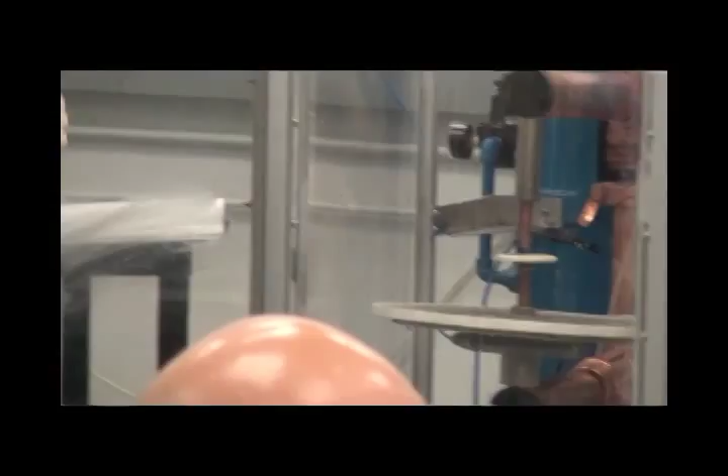So I'll show you, we'll put the current through a wire. There's nothing magical about it. So I have the gold wire loaded on there, and I'm just going to pass the current through it.

Gold was selected because it's very conductive, and that's the standard waveform—it's the output of the spot welder. There's a white trace, which is the current; it can go up to as high as 20,000 amps. Then there's the voltage, which is important—it's extremely low. You can see it peaks out around 8 volts, and there's something called root mean squared, a number that's kind of like the average over a cycle, and it's about 6 volts. So very low voltage.

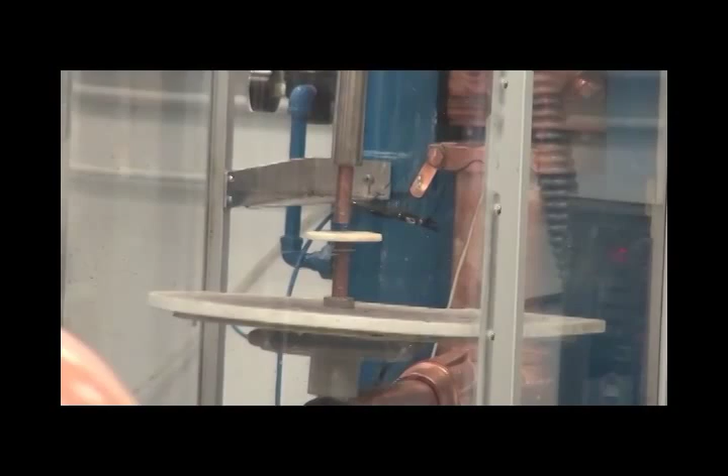We've got this here, let me point this out. There are 2 electrodes here, and then you see those big copper bars—that's the conductor for the electricity. He's going to close that pneumatically, and then those electrode rods will come in contact with the wire, and electricity will flow through it—just your standard kind of spot welding action.

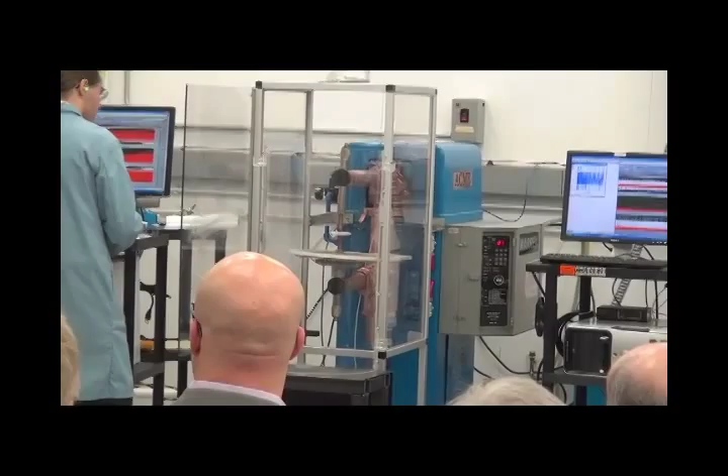So right there is where the focus is. Three, two, one. That's it—so it's just a standard old spot weld, nothing major there. You can see the waveform up there in terms of the voltage and the current and how the thing operates.

So next, Johnny's going to put in one of the solid fuels. This is nothing more than H2O, like this, and copper metal, put into what they call a differential scanning calorimetric pan. We just have a pan to hold it, and that helps with the conductivity, getting the high current through it. Copper is very conductive, so we use a powdered metal, and the water gets displaced and mixed in with the metal, and the metal is going to conduct electricity and allow this new reaction to occur.

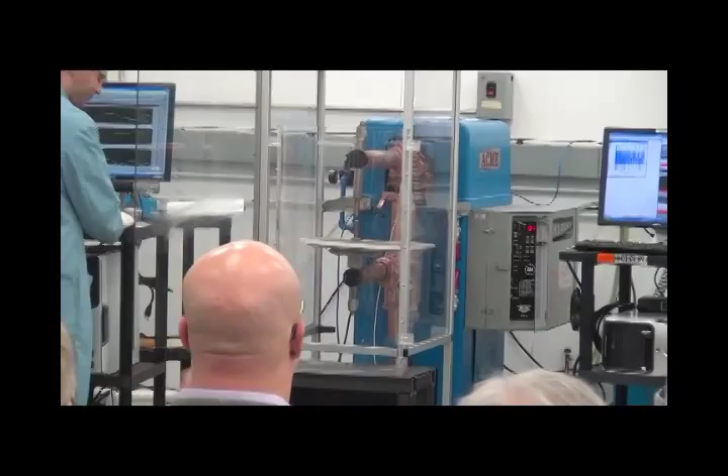So we call this one the Jumpin' Johnny. Three, two, one. All right, let's set off another one. So that was a lot of power.

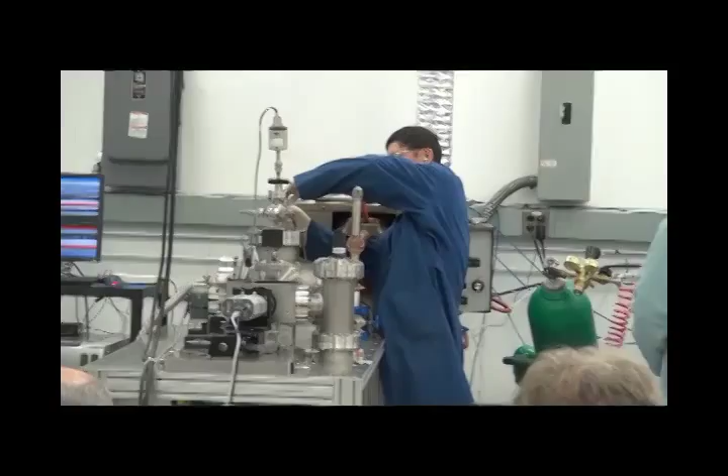Again, it's a standard commercial instrument, all new equipment. So he has another spot welder that will pass current through the rods. You can see there's two connectors, and there's electrodes going into this water bath calorimeter. And in there is one of the copper systems.

It's copper metal, copper oxide to help absorb the water and make it more dispersed, because we lose a lot of current on those smaller diameter rods due to the fact that inside that water chamber, we have submersed a cell that's filled with helium and has the electrodes and contains the sample.

I have to say that the detonations you saw have no theoretical energy possible. What that means is what you observed is not possible by any known conventional reaction. So that energy is being released by something entirely new, and it's entirely dependent on water being present and the high current being passed through it.

Now we're going to measure the thermal energy from one of these fuels. We put it in helium, so it's an inert atmosphere, and the helium helps transfer the heat from the ignited fuel to the water, and helps that coupling progress more favorably. So we get capture of that thermal energy released in the fuel in the water, and we get a very accurate reading.

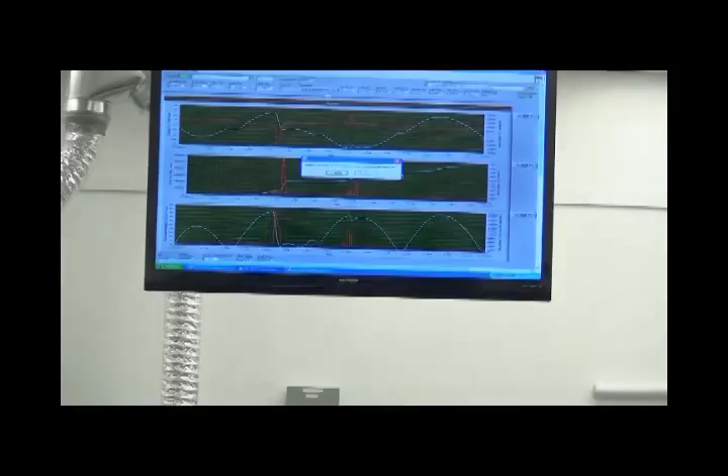Okay, it's detonated. So now his temperature will be rising. I'm going to switch to the screen.

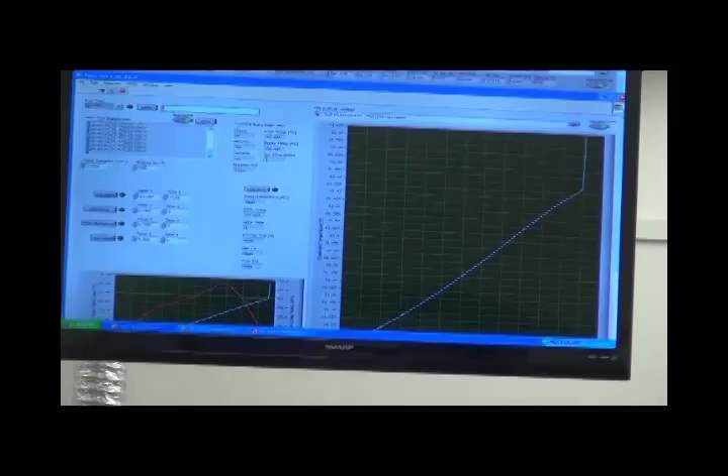He showed you the waveform, so we can integrate the voltage and current, and now you can see the temperature starting to rise in the right-hand corner of the screen. That water is going up in temperature, and then we can measure that temperature rise when all the heat has been transferred to the water, getting an accurate measurement of the heat released in that detonation, done inside a very, very strong cell submersed in that water bath.

It's good and strong because we don't want to destroy our calorimeter, because those are expensive.

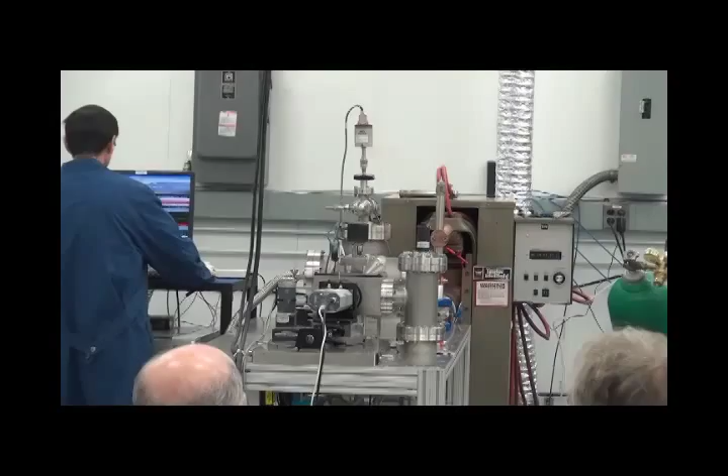What he has is an extreme ultraviolet spectrometer. Go ahead and detonate, and I'll explain why you're doing it. He has another commercial spot welder, with two electrodes going into a solid fuel, in a vacuum chamber.

You don't have to use your earplugs now because that's in a vacuum chamber, and you can't make sound in vacuum. It's in a very solid, thick-walled chamber. That little click was him just exploding inside the chamber. The pressures in these detonations get very, very high—they can get well over 10,000 atmospheres, or 10,000 times the pressure in this room.

But we have a big expansion chamber there. You can see that chamber where that blast expands and allows the light to come out. This is a different kind of light than the light in this room that your eyes are responsive to.

It won't even go through a centimeter of air. It's what they call extreme ultraviolet, or soft X-ray. Now usually you think of high energy light as being very penetrating—well, that's X-rays and nuclear kind of stuff, which is very bad and dangerous. What we're doing is something very, very safe. This light can't even go through air, even a minuscule amount, so we have to have this system under vacuum.

That light then travels to this unit on the end, called a spectrometer. In there is something called a grating, which takes light and breaks it into its characteristic component frequencies. Each frequency corresponds to a wavelength, or if you want to think of it in terms of visible, a color, and an energy. And that light from that instrument will show that this light is much higher energy than any known chemical reaction by about a factor of 100 times.

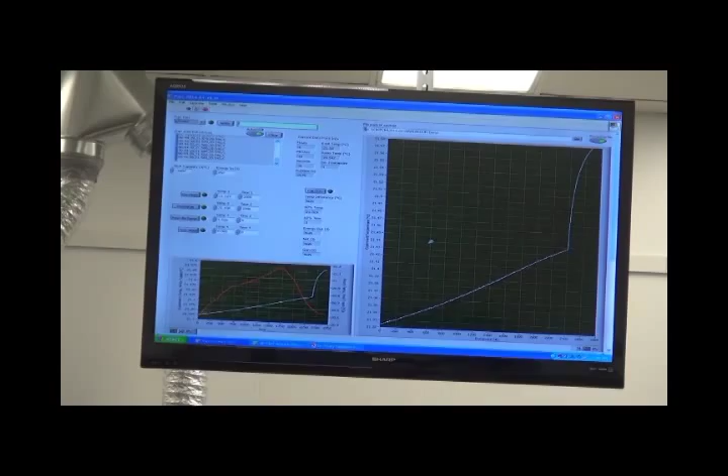Okay, we're just looking and you can see the temperature is rising in that calorimeter. So the thermal energy is being transferred to that water as I'm speaking here, and then we'll come back and get the reading of the energy that was released in that very, very minuscule amount of fuel. I want to talk a little bit about how minuscule that is.

That is a lot of energy for a very, very small volume, because I'll tell you what it translates into. The volume in there is about 1/100,000th of a liter. And you can see from the time scale of the trace we took earlier when we detonated the pellets, the solid fuel materials, that the time scale is about 1/1,000th of a second.

Munitions experts, people who work with explosives, said our time scale is much, much shorter than that, but we're just looking at the mechanical time scale when the system is disrupted by the pressure wave created by that ignition. If you take 1,000 joules of energy released in 1/1,000th of a second, which is extremely conservative—probably it's in the microsecond time scale—you get 1 million watts.

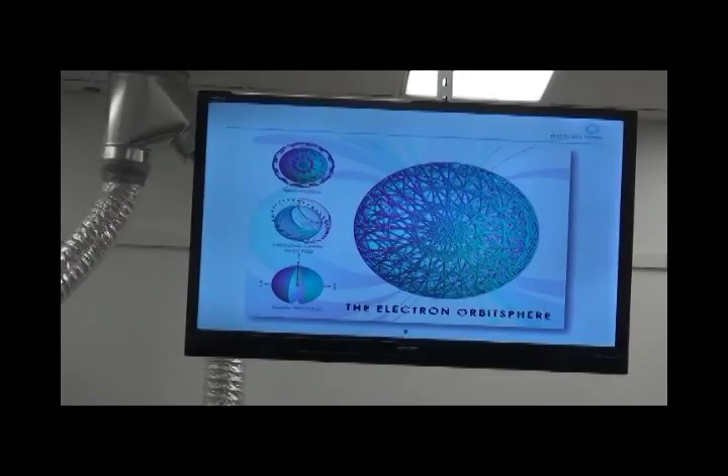So this is a computer-generated model of the electron. You can actually model the current the same way you model the electron, the same way you model current in an antenna or some other physical problem. It's the same types of equations, and it works very elegantly, just as it does on the engineering scale.

And then you can solve things that you couldn't even fathom solving with conventional theory. You can actually solve and then build up molecules on a part-by-part basis. You know how to build a building? You don't say a building's a quantum wave function. You say a building is bricks and steel and parts. You solve the parts, and they go together, and you get something really complicated, but it's made up of little pieces that are much more simple.

So you can solve the individual units that make up molecules. Then you can quickly add those all up and get molecules of boundless complexity and boundless extent by adding those parts together. And guess what? When you add the parts together, the current theory says you can't do that. It works absolutely perfect, again proving that the current theory is not correct.

How do we know that? Well, you can take 415 molecules and add the parts together. Here's the calculated and experimental data, and you can see it's a perfect line to the limit you can measure these experimentally. This is the current theory.

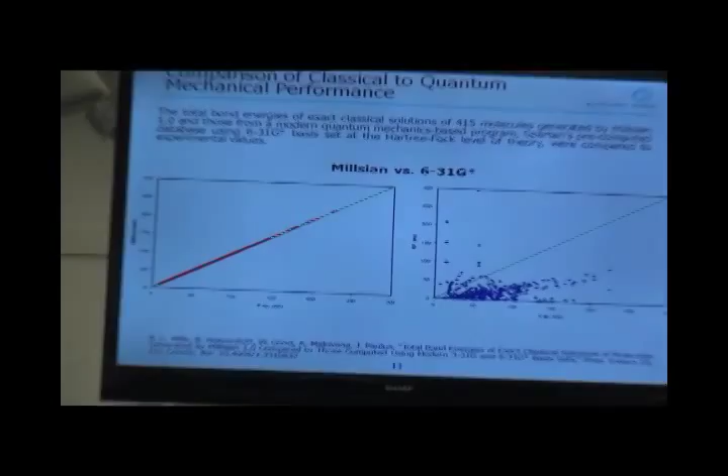It looks like a shotgun blast straight across the screen. You'll see them point to maybe one point and say, oh, the theory works perfectly on that line. But how about all the cases where it doesn't work perfectly? That's what really matters. It's got to work perfectly every time, and where you don't, you don't have the right theory.

So the other thing that condemns the current theory and further disproves it is that you can now actually image what molecules look like. The current theory says you can't show a picture of an electron or a molecule. The electron is everywhere at once simultaneously, has no physical form, and cannot be defined. Well, guess what? You can absolutely image the electrons in molecules now.

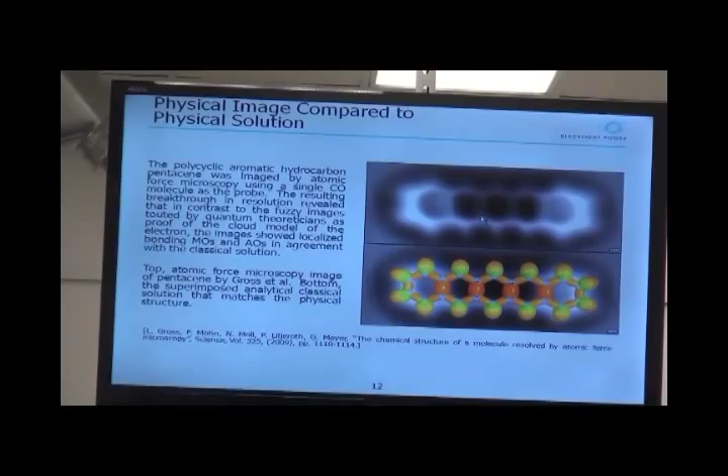This is a molecule called pentacene, and there's a technique called atomic force microscopy that's gotten more and more accurate. This is the solution using physical laws. You can see an atom here, and different bonds here, superimposed very well. All the energies and parameters you can calculate with these physical laws match the limits you can measure. So, like you saw with the experimental evidence from the detonations, seeing is believing. A picture speaks a thousand words. You can actually see molecules, and the solution has to match that picture, and our solutions do.

The quantum theory would say you can't make detonations from water. Water is the most known substance, and there's nothing out there you can possibly fathom that doesn't match our theory, they'd say. Well, guess what? Their theory would say it wouldn't detonate, and you just saw it detonate.

We also have instrumentation on the end that makes it even more compelling. We can take a material, not even a fuel, but water itself, and detonate it initially with a high current to form something called arc plasma. Once that forms, you get extraordinary high current through water itself, and it will make power.

We have that on the end, and then finally on the table at the far end, we have something called a differential scanning calorimeter, where we can pass high currents and power densities typical of what you get in a gas turbine, in the conventional realm. Ours being unconventional, but that's a commercial instrument, and we've shown that to many validators at off-site facilities, and some of those reports are on our webpage. So that commercial instrumentation is on the table there at the end.

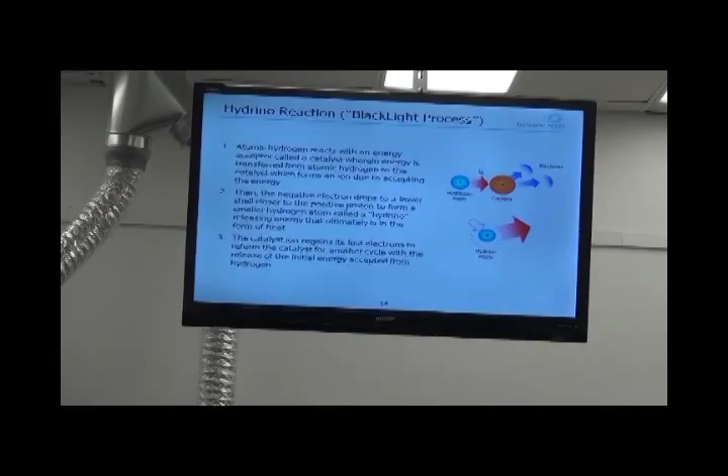So the way the BlackLight process works is you have a hydrogen atom that has a stable state and cannot emit radiation. But if you put that in proximity to something that can accept energy from the hydrogen atom in a discrete amount, that energy will flow to that acceptor, and the electrons will have to be ionized as a consequence of accepting that energy.

In our case, what I was saying before, these particular electrons, or this step of the reaction, are limiting. So the reaction will propagate until that charge builds up. It does not take much charge to build up until the reaction becomes limiting. So we run a very high current through it, and that allows that reaction to propagate at very high kinetics.

We then form an intermediate, which you can see as the dotted dashed line. The hydrogen atom has its initial radius, but once it's transferred energy, that's changed it to a different state, a different electronic state. It can't stay stable in that state, so the electron drops down to a closer orbit around the proton, the positive binding center, and releases light in terms of strong, very high energy light in the extreme ultraviolet that Dr. Ying is going to show you.

So you might say, well, what is the acceptor? What's that? Do you want to fire? Oh, okay. So Dr. Ying has the spectrum. Okay, that sounds good. So Dr. Ying has the spectrum already. Looks like he's got a really nice spectrum there.

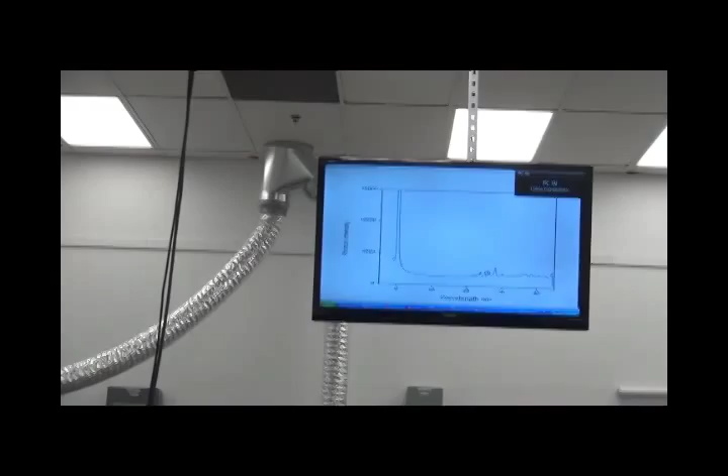Johnny's going to put that up there and run another one with this filter that blocks that high energy light. What you can see is, on the end here, there's a very, very high peak. That integrates all this high energy light over all frequencies and shows it in one peak.

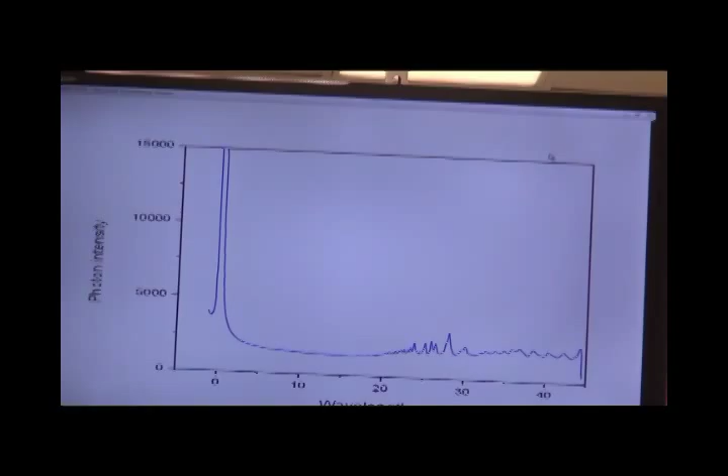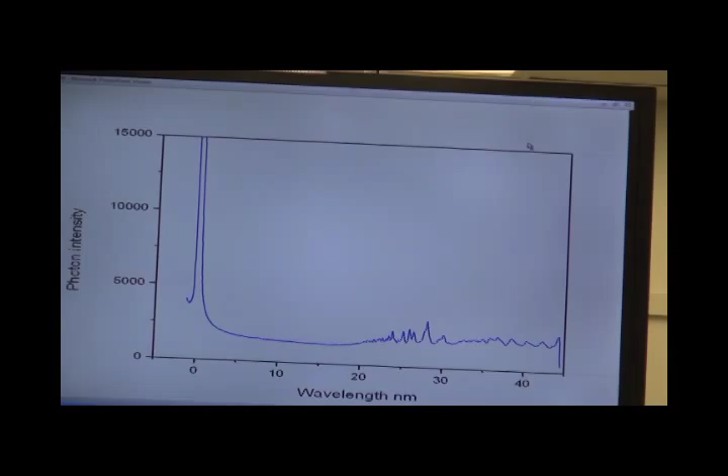In addition, you can see starting around 17 nanometers on this scale, that is very high energy. When you ionize hydrogen, the energy or wavelength released from that is much, much weaker. That shows up at 91.2. That's the energy just to tear the electron away from an ordinary hydrogen atom. So this is extremely, extremely high energy, even compared to that.

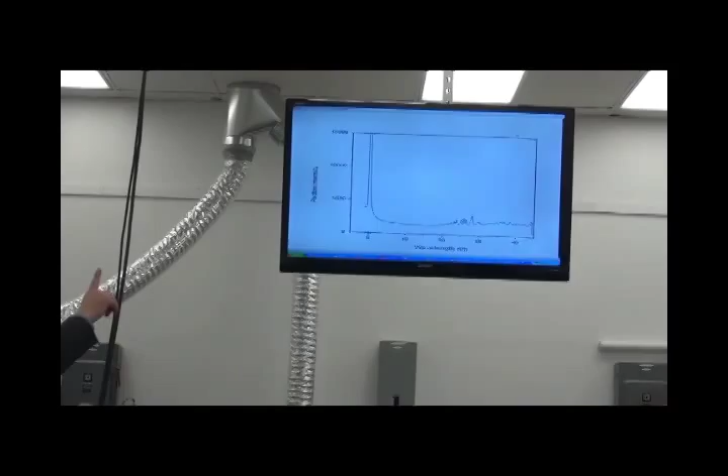Typical chemical reactions are a very, very small fraction of the energy it takes to tear the electron completely away from the atom. You can see there are peaks starting around 17, and then a really big peak at what they call the zero order, which integrates all this high energy light. He's going to come back and show you with another experiment that blocks that high energy light and proves it is this very, very high energy light that is the nature of the emission.

So then you might want to ask, what exactly are the kinds of acceptors that make this reaction work?

Well, again, there's a remarkable thing about water. The solution to water in terms of this classical theory is that you can have water accept energy in an exact packet of 3 times 27.2 electron volts. That number is a very special number - it's the energy the electron has relative to the proton in the uncatalyzed hydrogen state. If you take a negative electron and positive proton, the energy between those two is 27.2.

If you have something that accepts an integer amount of that energy, it can cause the hydrogen atom to go down to the lower state. Water has an increment of 3 times that packet of energy.

Not water like this - this is water that's hydrogen bonded. That means all the water molecules are interacting. Otherwise it'd be a pure gaseous state. Even in a gaseous state like steam, water has molecules that are bound together.

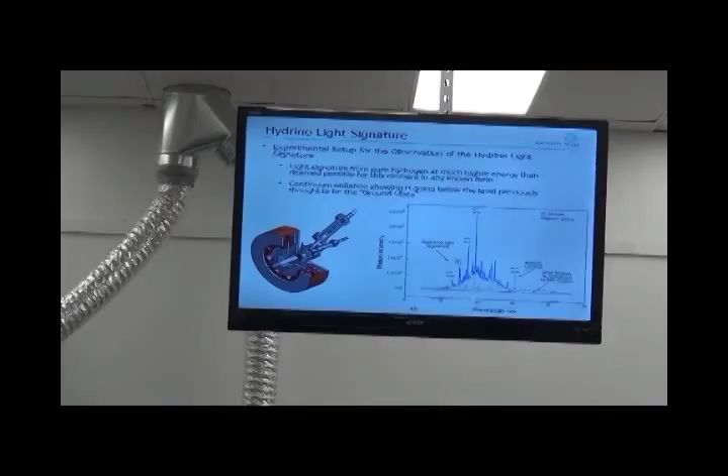This is a spectrum we've gotten before, published in European Physical Journal D. The editors wrote a note about how major this was. Then we got criticized that it could be due to some high fields. This is a discharge triggered by an electron beam. It's high voltage. We did a lot of tests to show it couldn't be due to the high field, but our critics wouldn't accept that.

So now we have something that has no high field at all, and this absolutely proves our point that the radiation is coming from forming this new state of hydrogen. It's a very, very important development. So we show the energy, power, and the detonation, and we also show the characteristic signature of this new form of hydrogen that has no alternative explanation as the source of that energy.

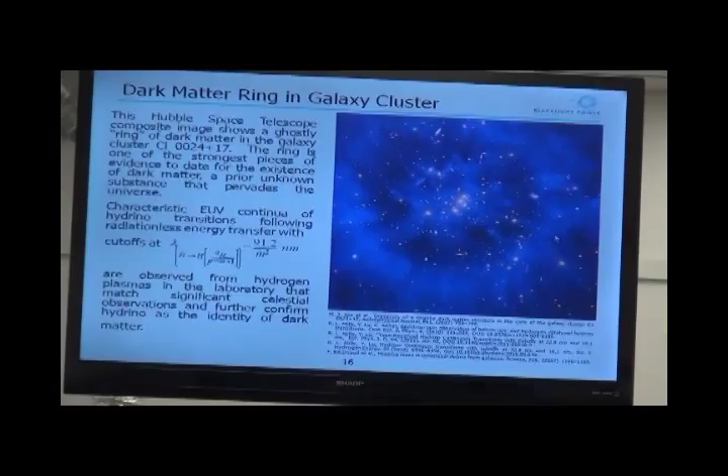How do you know that there's matter there? Because you can see galaxies like these that are comprised of hydrogen. In fact, everything you can see is hydrogen for the most part, but here it's not really emitting relative to this background. These galaxies have a very unusual structure, and the reason is that they're being gravitationally lensed from some other region in the universe. You can tell that by changing the angle of the telescope.

So this is absolutely seeing is believing, like we're showing visually that you can detonate water. This is showing visually what dark matter looks like. It's a real thing, not something people thought about in theoretical terms. It's actually a physical phenomenon that you can observe, that there's mass that has gravity, but you can't see it visually.

The reason is, once you form this new state of hydrogen, it cannot absorb or emit light. It's a different kind of reaction. Remember, we have a catalyst that accepts the energy, and then the electron drops to this lower state and releases continuum radiation. So it's different than the typical mechanism by which electrons absorb in ordinary materials.

So this hydrino is unique in that characteristic, that it's dark. But we can see it by other analytical techniques. We can show that it rotates, vibrates, has an NMR, and other characteristics. We have a number of analytical techniques that will show this new form of hydrogen. This is just a listing of those - common spectroscopic techniques used on other ordinary compositions of matter. There are specific energies or frequencies that absolutely are characteristic of and identify this new form of matter.

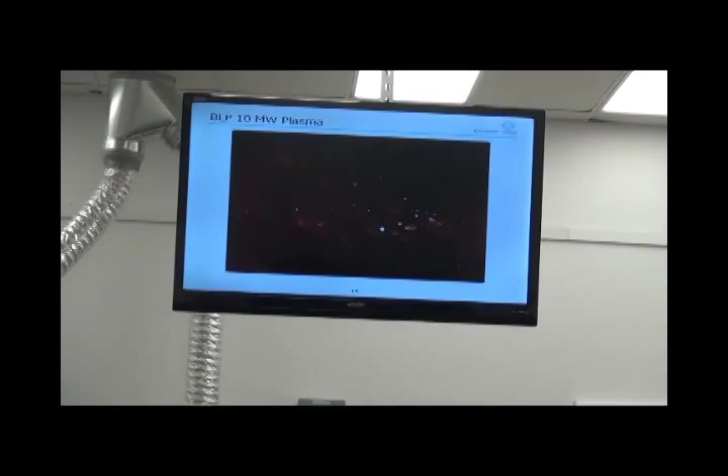I'm going to show you what the plasma looks like when filmed at 6,500 frames per second - this is a camera they use to film explosives - so the time scale is much, much shorter than your eye can appreciate. What this shows is that the solid fuel is becoming completely vaporized and completely ionized, expanding at supersonic velocities, meaning it's going faster than the speed of sound.

That extraordinary high kinetic energy and highly ionized state is a flow of current, and that flow of current can go into a direct plasma-to-electric converter. There are two common types of plasma-to-electric converters: one is called magnetohydrodynamic, and another called plasmadynamic, which we actually invented here at Blacklight. The magnetohydrodynamic relies on separation of charges in a magnetic field, captured in two electrodes. The plasmadynamic is a similar type of process. I'll come back and show more details of the magnetohydrodynamic.

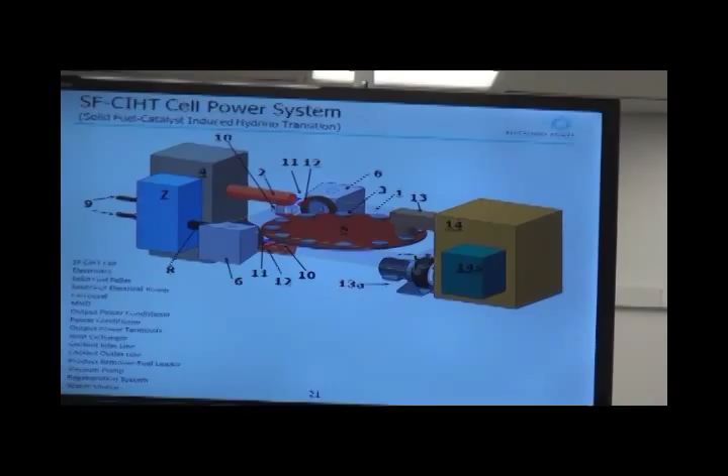To make that ignited fuel into a continuous process, we have to feed the pellets mechanically in almost a continuous stream. In other words, you have so much energy, and energy times frequency gives you power. So if you took one of these pellets and put it in once a second, you would have 10 kilowatts. If you put it in at a frequency of 1,000 hertz, that comes out to be 10 megawatts for the amount of fuel we're proposing to load. I'll give you the dimensions of the fuel and the characteristics of the machine we intend to build to deliver 10 megawatts of electricity.

This is a mechanical carousel that would robotically load fuel pellets. This is not our ideal design - it's just conceptual, to give you the idea that you would add fuel in increments, and if you add that increment fast enough, eventually it would appear continuous. Like movies - once you go beyond 33 frames per second, your eye sees it as continuous motion, even though the film is discrete individual frames. Same principle applies like an engine: if you hear it firing very slowly, versus at very high RPMs, it almost sounds continuous.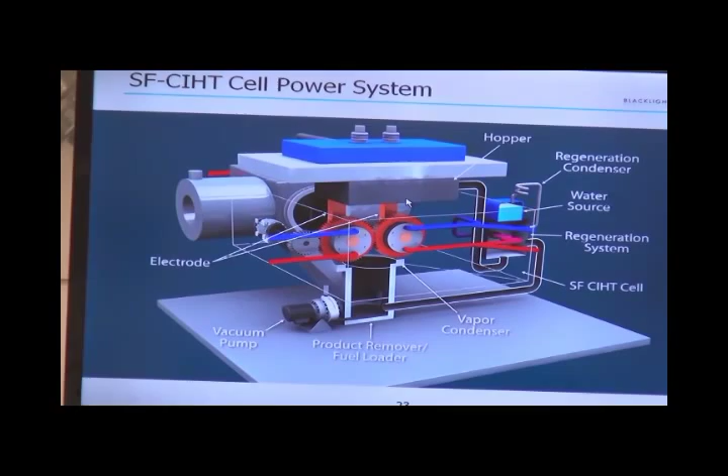So, this is our basic system. It's 9 inches by 9 inches by 9 inches. It'd be a 10 million watt electric generator. It has different parts. These are all off-the-shelf technology that can be integrated as parts into this generator. No new technology.

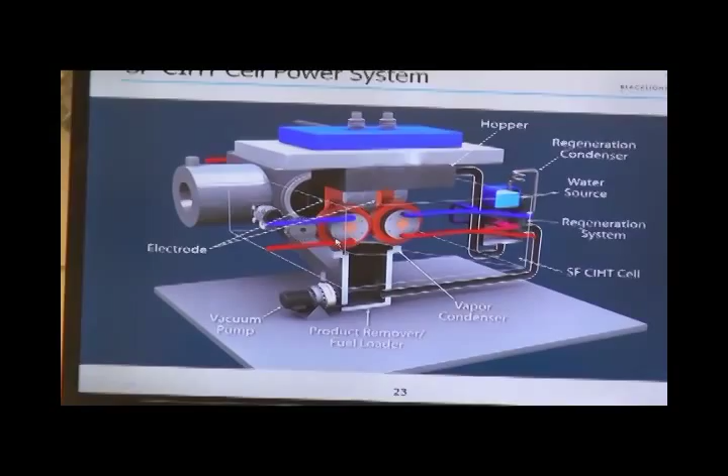So it has a container that holds the fuel. As you see here, the electrodes, it has electrodes, and then they have on it a stationary hub. They heat sink these gears. These gears are driven by a drive gear and a drive gear motor.

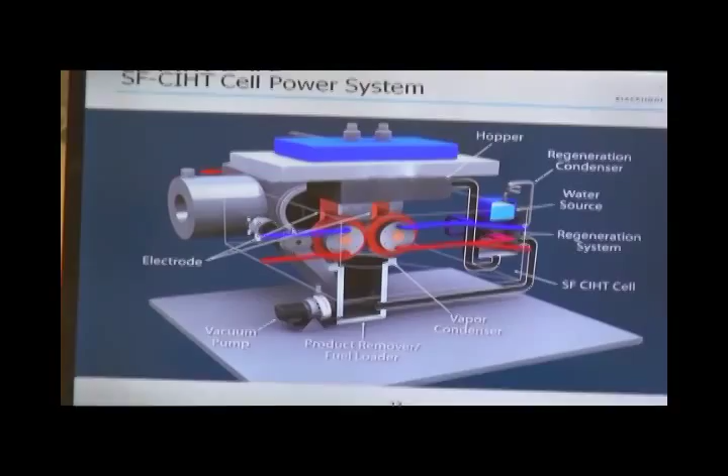So how big would the gear tube have to be, and how many teeth, and how fast to make 10 million watts? Turns out to be at a 62 gear, going at 1,000 RPMs, and the depth of the fuel was 2 millimeters, and the base was 4, and the gear was half an inch, about a centimeter wide. That would give you 10 million watts.

So it's not very much. To give you an idea, 1,000 RPMs is really trivial. The Formula One racers are limited at 18,000 RPMs for a 4-stroke engine, which is very, very complicated with valves, camshaft, crankshaft, 4-stroke, 4 different parts of the cycle. They're running at 18,000 RPMs. We're talking 1,000 RPMs just for turning gears. It's really, really mechanically trivial.

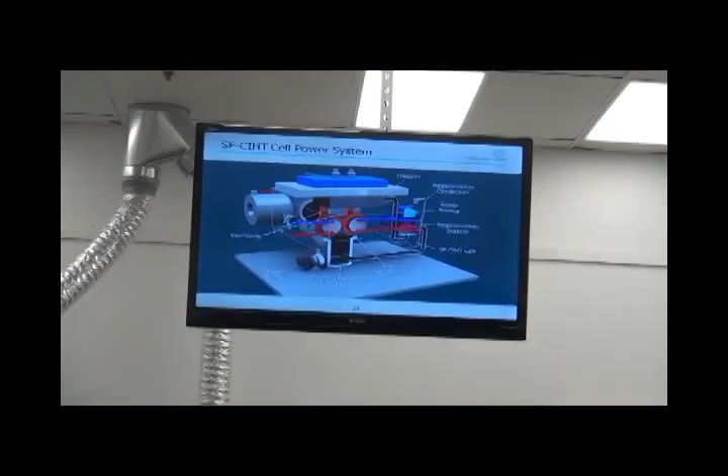So then we have a chute in the back here to collect the fuel. After the fuel fires, the plasma flows into this magnetohydrodynamic converter, which I'll explain. And then that fuel flows back to chute. It's recollected, goes back into a circulating system like an auger, like they have in the pharmaceutical industry.

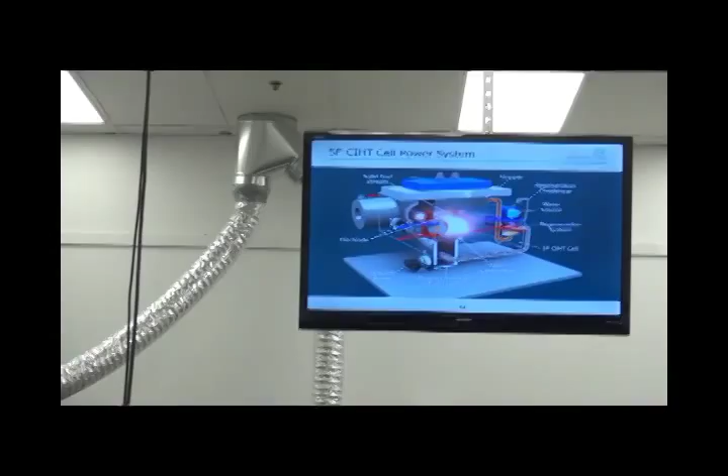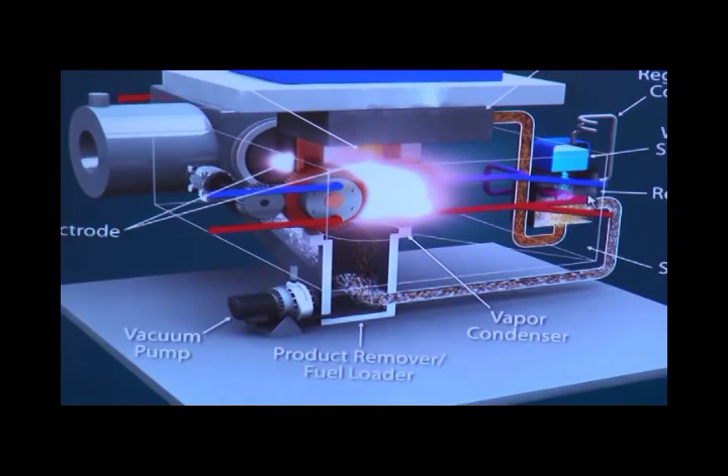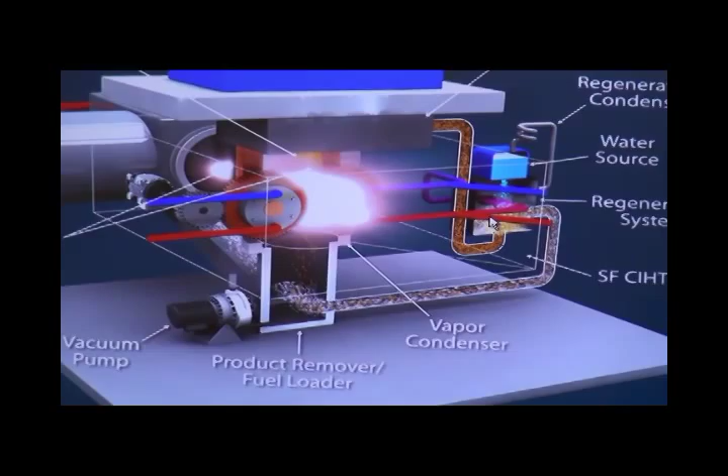Goes into another reservoir. You can see there's steam in here. Steam is formed by water falling on a hot heat exchanger. The heat is coming from this heat sunk here, and it's being returned by this cold coolant line. So the water forms steam, the fired fuel comes in, gets rehydrated, and then goes back into the fuel reservoir, and then gravity feeds into the gears again. It's very, very simple.

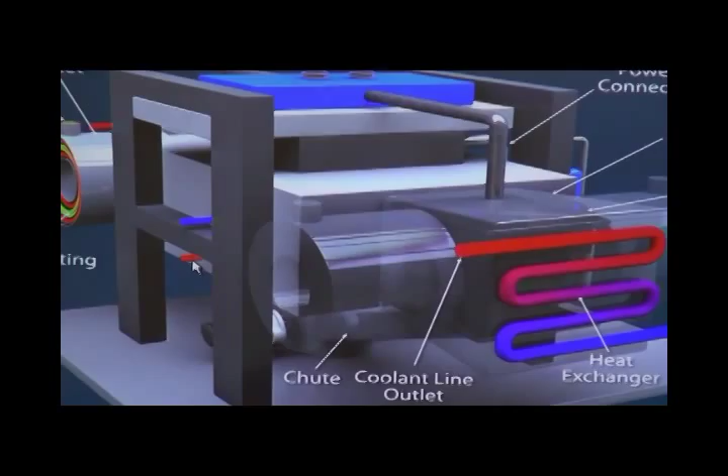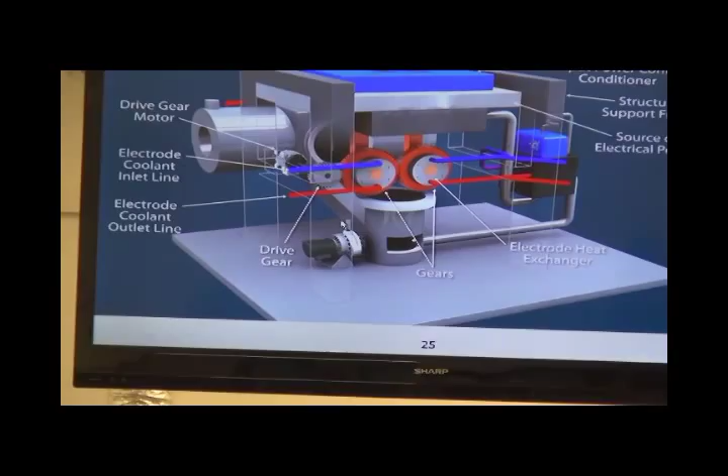These are magnets. I'll talk about the magnetohydrodynamic system in a second. There's a vacuum pump that pumps down this vacuum chamber. You can see the outline here in white of the vacuum chambers. It's all sealed up, runs under a vacuum.

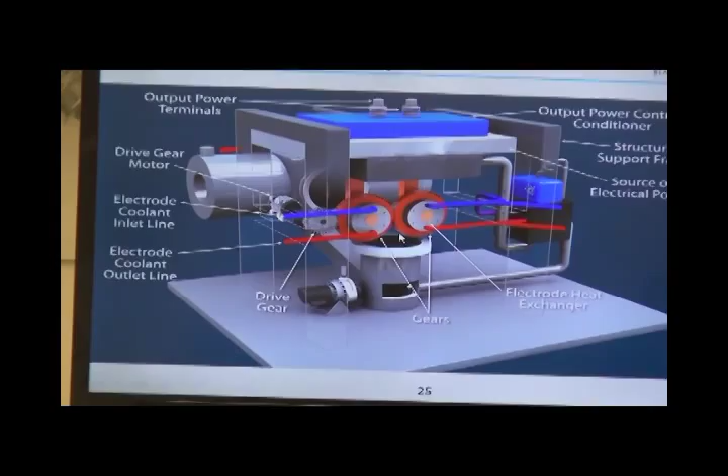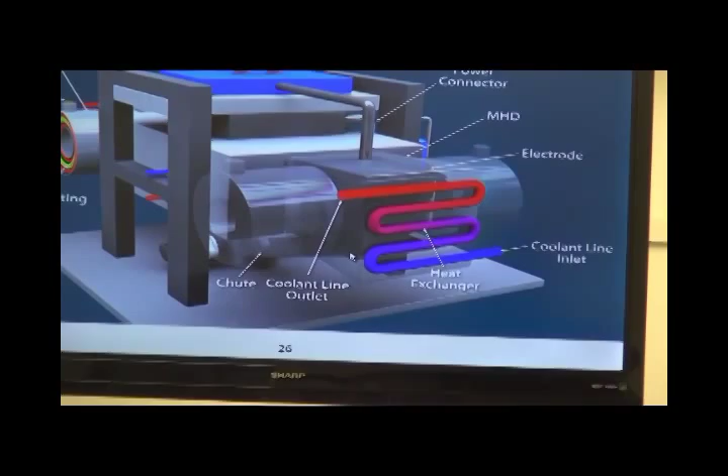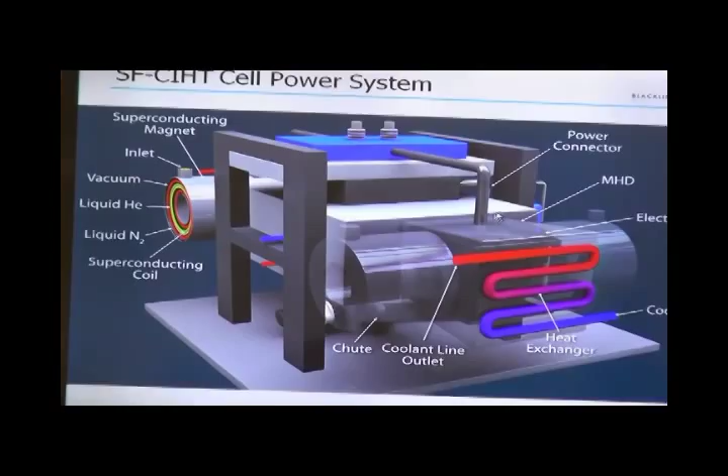These are magnets for the magnetohydrodynamic converter. This top plate, and then there's a symmetrical bottom plate on the bottom. That is the electrodes that collect the current from the magnetohydrodynamic converter. We would use superconducting magnets. This is a power conditioner. This is a source of electricity for the electrodes. This is a power connector from the electrodes of magnetohydrodynamic back to the power conditioner. Magnetohydrodynamic puts out DC electricity. High current DC electricity. That's what we use on detonation or ignition of these pellets.

High current DC. So a portion of the electrical output could run the system. So it can be completely autonomous of the grid and also autonomous of fuels infrastructure. And as I show, it can be used for every conceivable application within the size range that you can make these units.

Randy, a quick question. How would you start that unit off-site? What kind of a battery starter? Big DC. Or super capacitor. And then power conditioner would have that as part of the system.

So, Sam brought up a point. This power supply is nothing more than capacitors. Basically like a can of soda. They weigh about the same. And you can store a lot of charge in it, and then it can act as a battery for very, very fast delivery of power, a very, very high current. So that's what we would use. Something that's very, very cheap.

So I'll explain the MHD here in a second, but basically the cost per unit would be these magnets. These superconducting magnets, even if you want something, they're very, very small. The whole volume here, again, is 9 by 9 by 9 inches. Even if you want some crazy number, like $10,000 a magnet, you got 40,000. You got a couple $1,000 in terms of sheet metal to make the vessel, to make the MHD plasma expansion chamber. You got a couple $10 in electrodes.

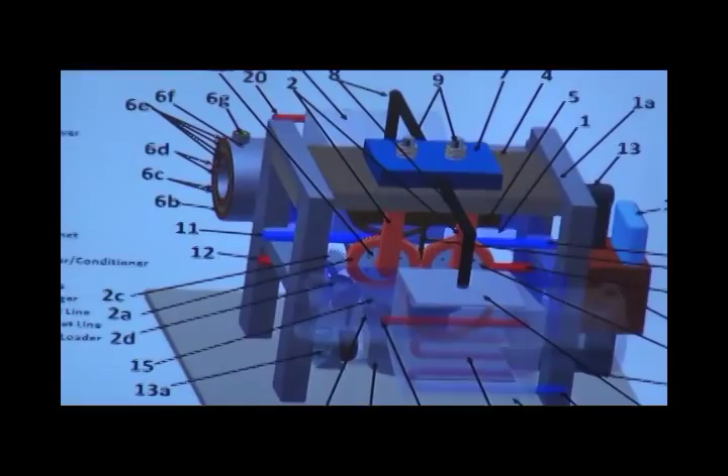This is on our web page, we have the PowerPoint with these slides and the different parts. We're looking for companies to partner with Blacklight—we're already talking to a number of them now. We want to partner to make parts: they can make the electrodes, the gears, the magnets, the power controller, or they can source electricity for the electrodes, etc.

So we will work with different companies and assemble those components to make our generators. Our business model is to license original equipment manufacturers to make the units for Blacklight, and Blacklight would lease them to power users under power purchase agreements.

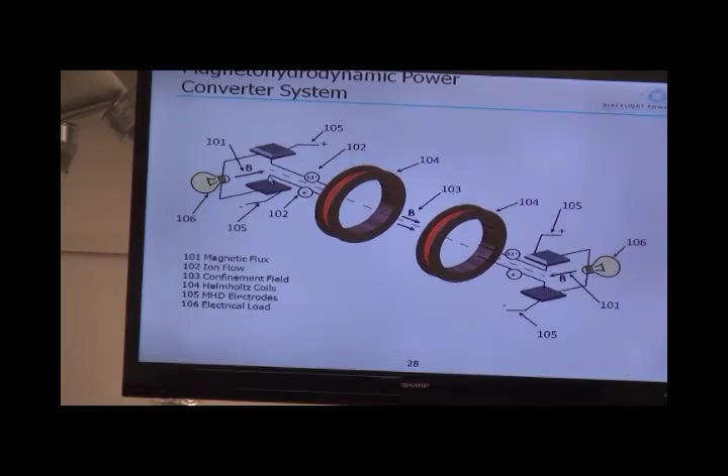So the way Magnetohydrodynamics works is very simple. You have an expanding plasma, which you saw in that video. This coil is a magnetic field that guides the plasma so it goes axially. It goes into a cross magnetic field so the plasma goes along its axis, and the positive ions are bent up and negative ions or electrons are bent down because of the force of a cross velocity in a magnetic field—this is the Lorentz force.

So you have a cross field with a flow of charged particles. It's deflected in a mutually perpendicular direction to both of those. So it goes to the top or bottom electrode depending on the charge. That gives you a voltage, then you can pull power directly off that core.

So what a magnetohydrodynamic converter is, is a motionless generator. It's like a generator in a conventional power plant, but it has no moving parts. The current, or the part that substitutes for the moving part, is the flow of plasma. In a conventional generator, you have to mechanically spin a wire; in this, the plasma is flowing—that's the conductor, like a wire, moving in that magnetic field and producing the electricity.

So this is really cheap. The power in the plasma is very high, so you can make this very compact and very efficient—again, very low cost on a per watt basis. This one is an old one that's been around for a long time. Yes, I'm going to show that. Magnetohydrodynamics is a known technology for many decades.

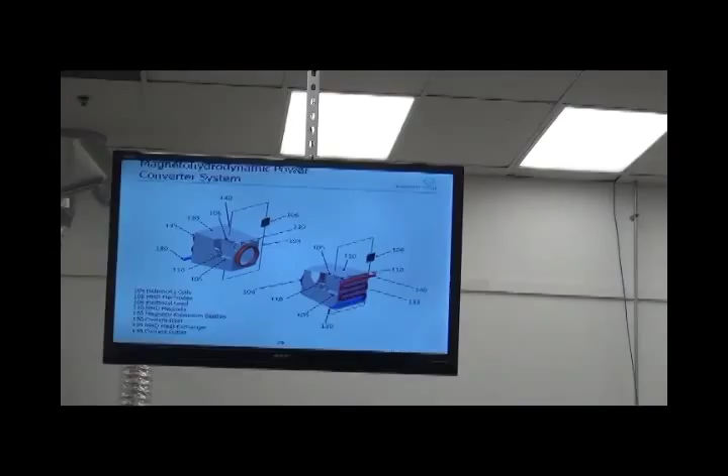Just go to a volume-filled schematic of that. It's showing, here you can see the placement of the magnets transverse to the plasma flow, and then transverse to both—you have the electrodes.

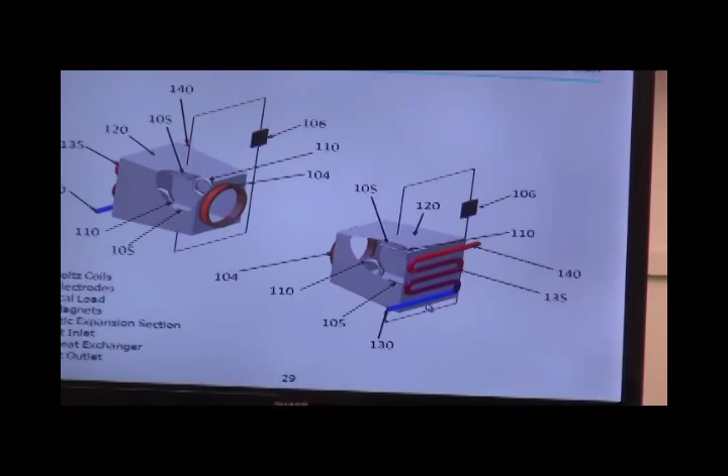You also have a heat exchanger on the back that holds this device, because you're going to have some heat produced—we have heat transfer experts working on that. One advantage is we have very concentrated thermal energy, which makes it much more convenient to remove.

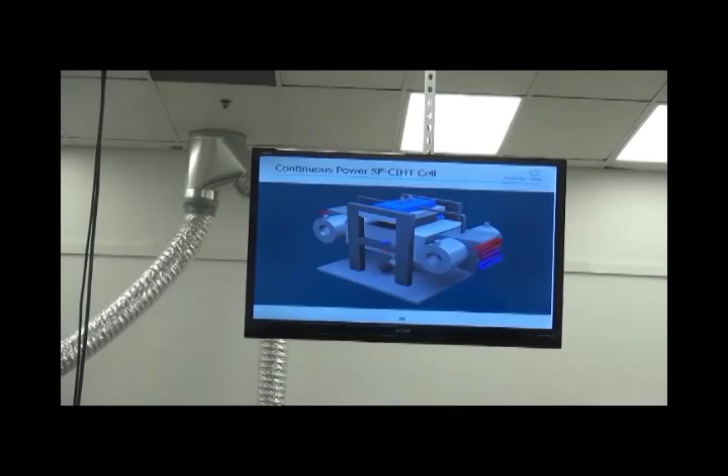So this is just an animation that goes through the workings of this schematic design of our engineered system, and shows the different parts and how it works.

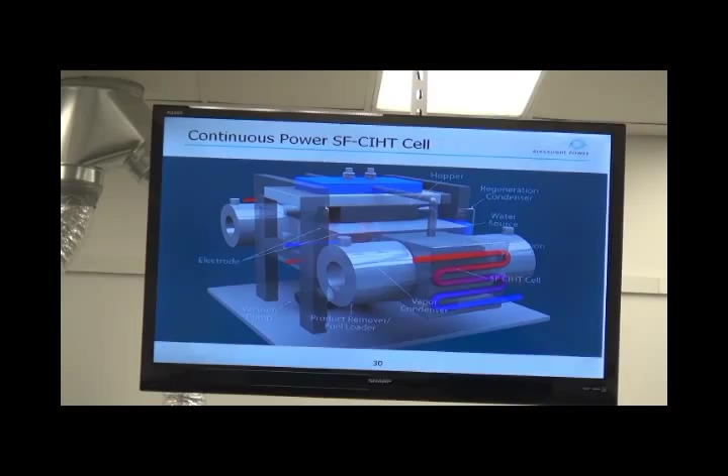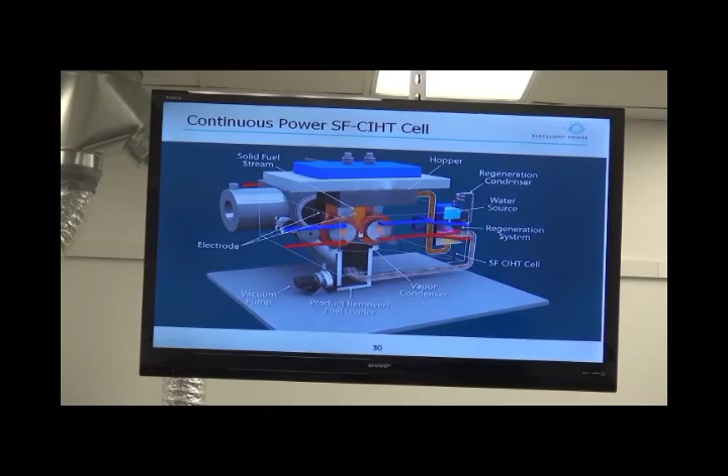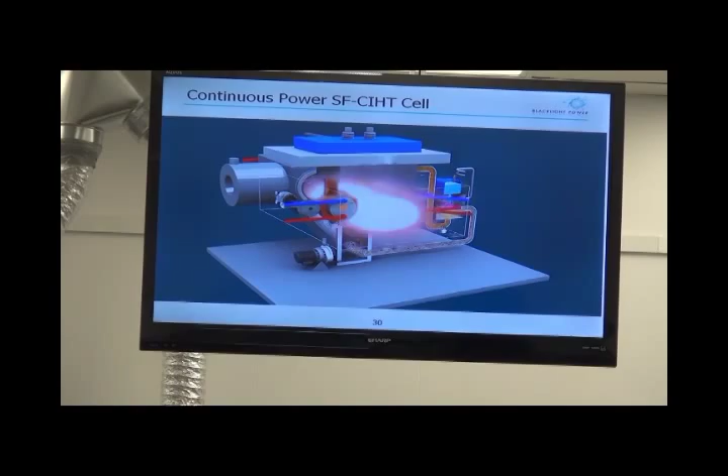So as I said before, we have different components—there are off-the-shelf parts. One part contains the fuel, and the fuel drops down into these gears—you can see them spinning. You get the plasma forming, flying to the Magnetohydrodynamic converter, making electricity.

The fuel returns, gets rehydrated, goes back into the fuel chamber for another cycle. We've taken the fuel, hit ignition, and analyzed it—the fuel is unchanged. It actually works better when you hydrate it and reuse it, because the explosion and plasma expansion creates an extraordinarily fine powder with higher surface area than the starting material. Only the water is consumed in that reaction, and we've shown you can rehydrate and reuse the fuel, and it'll work even better in the recycling.

Brandon, can you explain to us how the spent fuel, once it falls through the gears, how is it driven back to the steam unit? Like how is it pulled along?

Yeah, I'll take questions at the end, but just to answer that, the pharmaceutical industry has been able to do that for many decades. Typically, to move fine powders in pharmaceutical ingredients, they use augers. You can also electrostatically charge a belt, and use a belt conveyor with electrostatic charge. Photocopiers use electrostatic electrosprayers, and pollution control equipment like electrostatic precipitators can collect charged particles and adhere them to surfaces very easily to either move them or otherwise manipulate them.

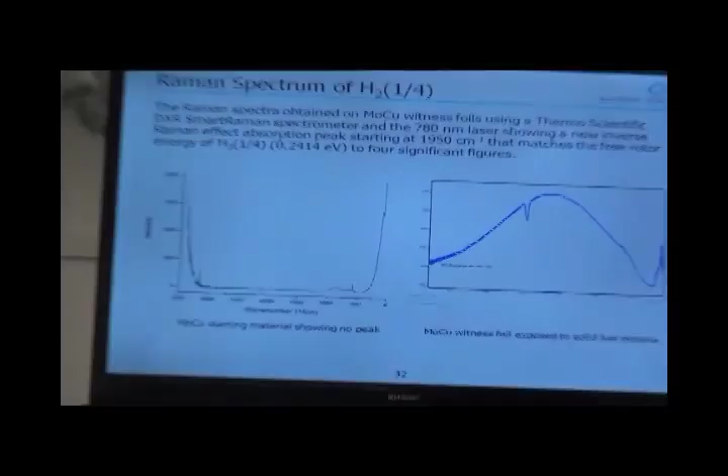And that dip right there is identically at that peak, and that's the gas we get off, and it shows that characteristic signature, and there's nothing known in this system that can give any peak there, and that is the smoking gun that we're making hydrinos in this reaction. There's 12 types of analytical tests that we do that are similar to that to prove we made hydrinos.

So it turns out that the Magnetohydrodynamic is an off-the-shelf technology. The Russians are still using it over in Moscow. We're working on getting them to make us a magnetohydrodynamic converter, and they have quite expertise in it. There's groups over in Japan that have large units as well. In the US, we've also run large units, but it's kind of fallen out of favor.

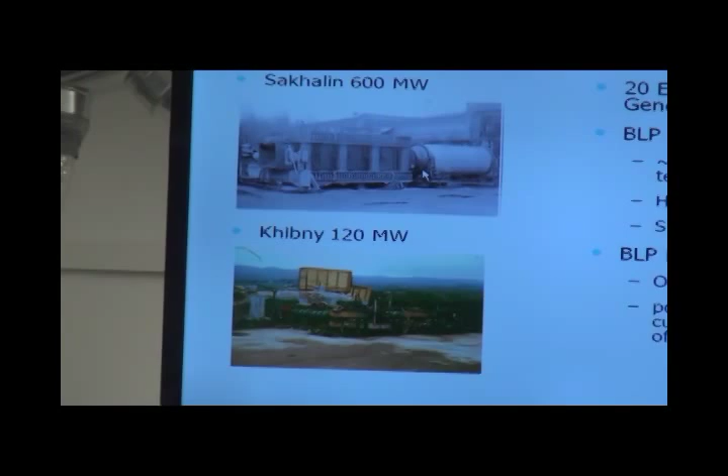So then it gets heated, and you know what happens whenever you heat something in a confined space - it builds up pressure, wants to expand. So they have it shoot out this nozzle and into this 600 million watt magnetohydrodynamic converter. Now keep in mind, we're going to look at 10 million watts, so it'd be 60 times smaller, but our plasma is 10 million times more power per volume than coal fire.

So that means we can make it a lot smaller because we have so much power in a small space. This is big because you need to flow all that gas through there, and you can't get it to that extraordinarily high pressure. So ours is much more energetic and should be much smaller. So the dimensions I showed you are the best calculations we have presently in terms of the relative scale of all the different parts on that 9 by 9 by 9 meter.

Having something very small and very autonomous has advantages and can serve a vast array of power applications. When you're making billions of watts per liter, it's very compact. The fuel is ubiquitous - anywhere, even in the desert, has a vapor pressure of water, and you can get water from humidity in the air, water-absorbing materials, or just put water into the system.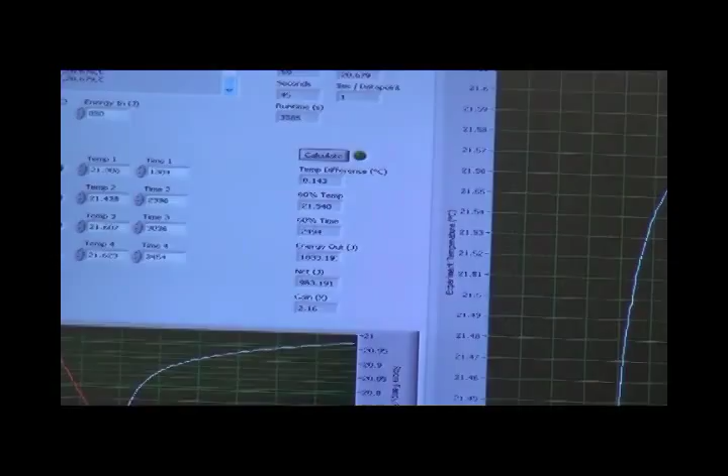So Dr. He has now put up the calorimetric trace for the calorimeter. You want to go over just what the units are and the numbers? And then Dr. Lu is going to show his spectrum on the extreme ultraviolet.

It's called a grazing incidence extreme ultraviolet spectrometer, made by McPherson, model 310. This is in case anybody wants particulars to try this in their own lab.

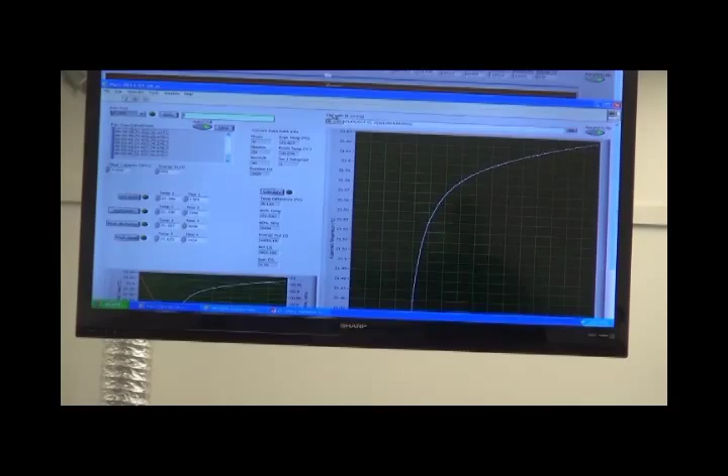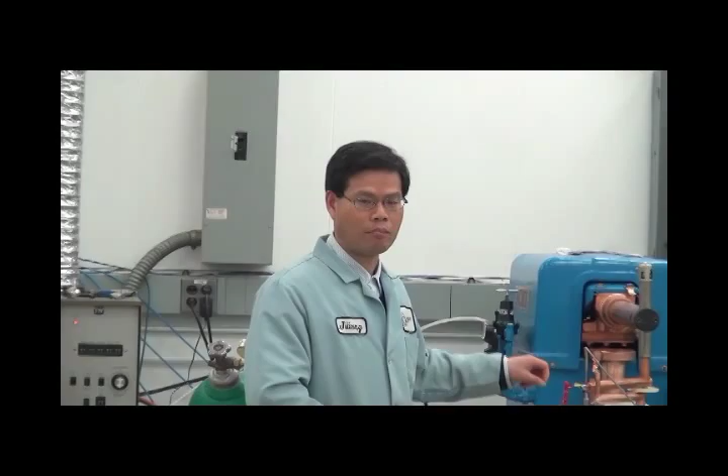So we got the number here: 1833 is power out. So that we get 980. It's almost 1 kilojoule that hour.

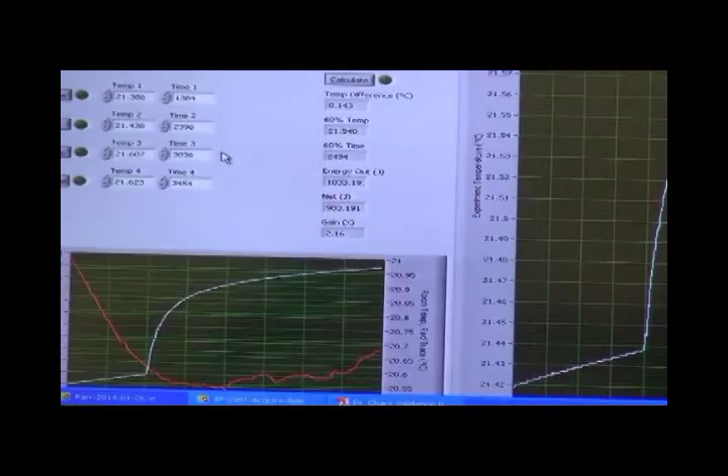So you're saying before: 1 kilojoule, 1 millisecond, 1 megawatt, 10 to the minus 5 liters is 0.1 terawatts of power. And there it is live, created here at Blacklight. So you've seen it for the first time: terawatt power densities per liter, controllable, that can be converted to electricity.

So now Dr. Lu is going to go over his spectrum proving that the source of that power was in fact the formation of these new states of hydrogen that we call hydrinos. It has a characteristic high energy light, higher than any possible emission of ordinary matter, and cannot be created by a high field or any other alternative explanation. There is no high field present.

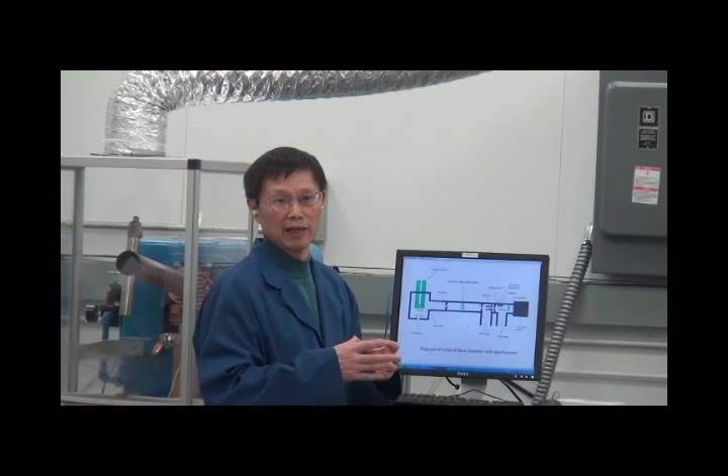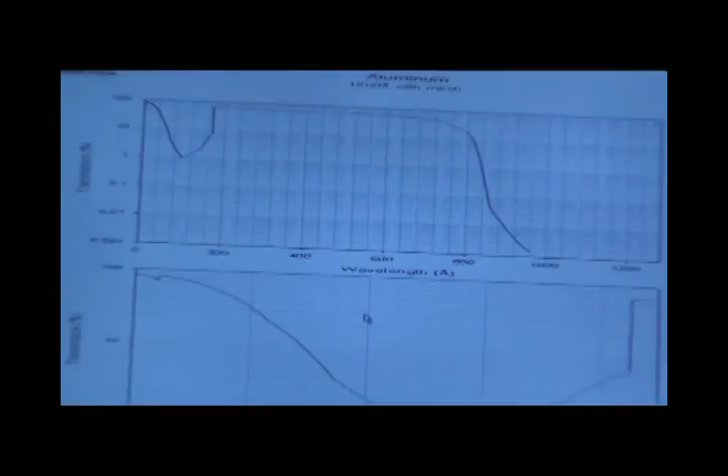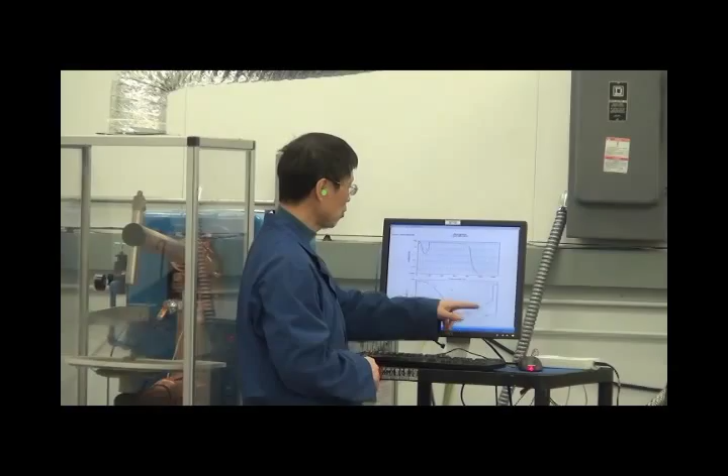On the path of this chamber, we have two aluminum filters. Aluminum filter is well known; it can block the visible. This is the efficiency curve of the aluminum filter, the transmission curve. Basically, it allows photons from 17 nanometers to 80 nanometers to pass. The visible will be blocked, and some short wavelengths below 17 will be blocked because of the notch in the efficiency.

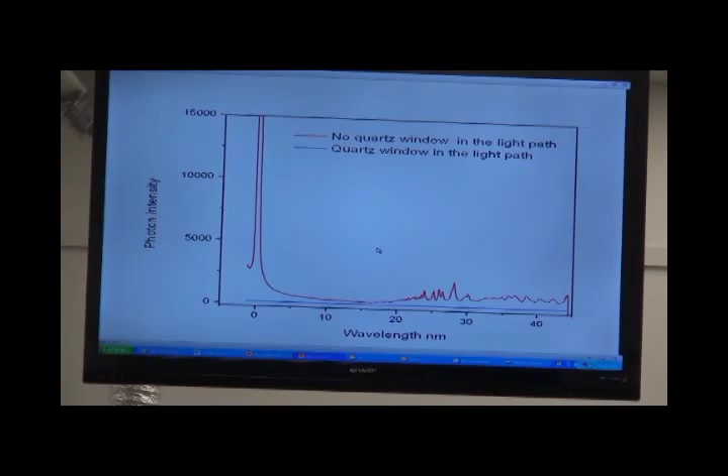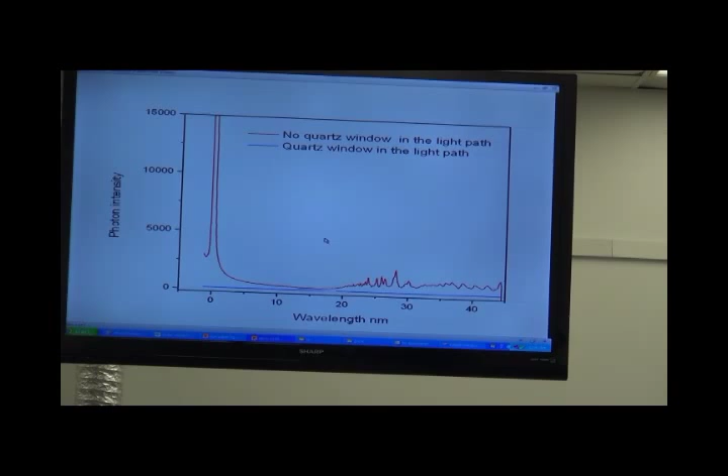We combine a spectrum with the blast sample and with two filters on it, and without a quartz window. Previously we had a quartz window set up in the system, and the quartz window can block the UV but let the visible light come through. So we have two spectra: one with the quartz window on, the blue line, nothing. The quartz window blocks the UV so visible passes, but the aluminum filter blocks the visible. So the spectrum without the quartz window is EUV light.

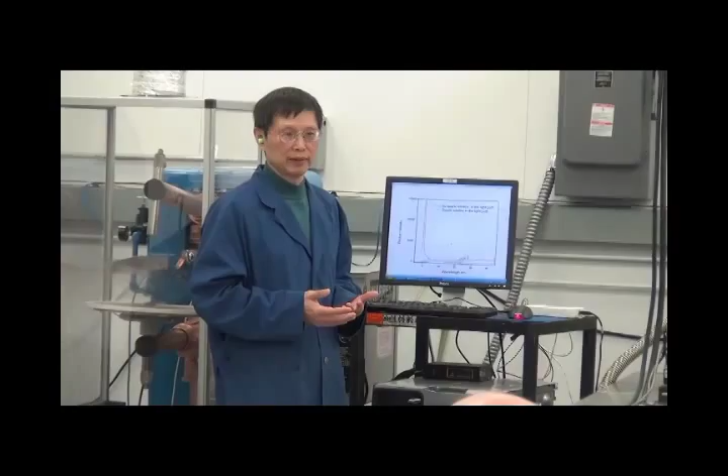Okay, that's good. So there's EUV light being emitted and power being generated, and we have a new source of power, systems to harness that power, and we've had 4 validation teams in so far, confirming the extreme ultraviolet light, confirming the plasma characteristics of those plasmas, extraordinary energetics that we're seeing, more so than known conventional high explosives. Again, it's not a high explosive.

This is only ignited when you throw current through it. It's limited to the very exact position where the current flows. It won't self-propagate like explosives, so it's got beautiful characteristics as a fuel, and extraordinary characteristics in terms of being a source of plasma for direct electrical conversion. Systems appear to be extremely inexpensive, and they use commodity chemicals.

And as I said before, here in this last point, the capital cost is projected to be extremely small, about 1% that of conventional capital equipment, no fuel costs, completely autonomous.